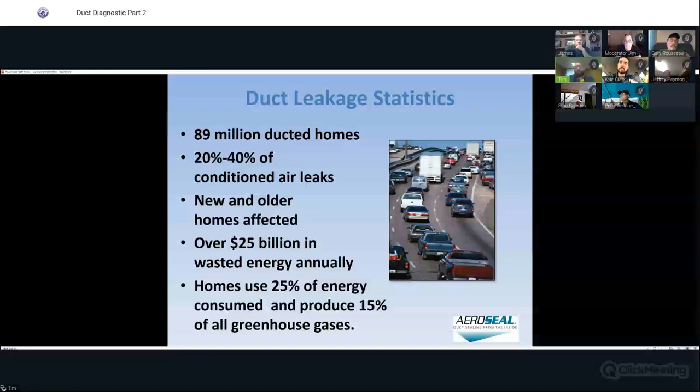So duct, sorry, I'm reading this because it's been a while since I looked at this slide. So duct sealing with regards to the EPA comfort. Whenever any homeowner calls you and says that they're uncomfortable in their home, 90+% of the time, it has to do with humidity.

Does anybody know what's the purpose of air conditioning? To remove the humidity, remove moisture. Beautiful, yes. So 90+% of the time when you get - and maybe you guys don't get these calls, but I get them frequently - people say they're uncomfortable in the house. Most of the time it's a humidity issue. Either the returns are leaking or there's not enough returns.

Health - anybody familiar with what's called the Venturi effect? So imagine a supply duct, but on the seams it has gaps. You would think the supply duct, while it's positively pressured and air is escaping because of the positive pressure, it's also putting the immediate space around all those gaps under a negative, and it's drawing debris actually into that supply duct, even though it's under positive pressure. That's called the Venturi effect.

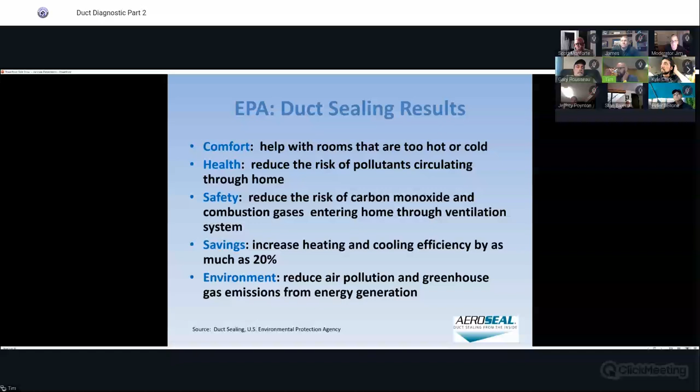Department of Energy, they did a ton of testing. Again, from what I'm learning, this slide is old, but from the stuff that they push out, it's only worse than that. And in my experience, I would even agree when I do duct testing, duct systems lose on average between 25 and 40% of their heating and cooling. The cost to seal and insulate the ducts has got an incredible ROI, which I believe there's a slide in here, the McKinsey chart we'll get to soon.

Only half a typical loss on ducts were saved. It would amount to, yeah, that all comes to energy efficiency.

Is there anybody familiar, at least in Connecticut, not Massachusetts? In Connecticut, they have an energy program called HES, Home Energy Solutions. Is anybody familiar with that? Okay, yeah. So to those of you who are not familiar with it, it's a program run by the utilities.

Essentially, you'll pay 50 or 75 bucks, and for you guys and for your homeowners, literally everybody should do this because it'll cost you 50 or 75 bucks. A company will come in and do about 4 hours worth of legit energy work to your house. To kind of explain how the program works, do you guys know what a blower door test is?

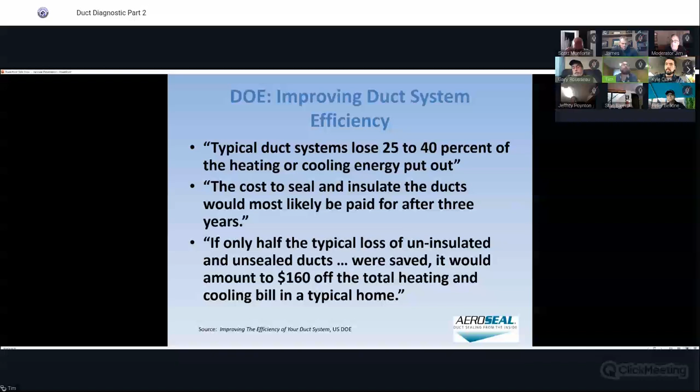This is the McKinsey chart I was telling you about. It just shows, in terms of duct leakage, sealing your ducts, is the biggest bang for your buck.

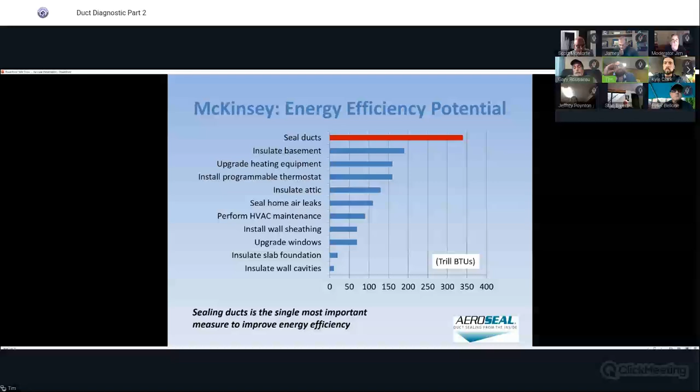I'm just gonna use my house for example. My house, obviously it's insulated now. I completely renovated the first floor, and then I blew insulation because it's balloon construction up in the outer wall. So I'd say my house is maybe a little spot on the staircase over here that's insulated, and with all the ducts, even though I went back and forth, I insulated the ducts. Every duct's taped, insulated, and I'm telling you what a difference as far as heating, the cost of heating, how much warmer, more comfortable it is, and the ducts don't leak. Everything's tight in the wall, above the ceiling.

Yeah, and all your ducts, I remember they were in a mechanical room in the basement. Everybody says the basement, that's the coolest part of their house. Well, right, inevitably it is going to be, but not to the extent that most of the time it is, when they're properly insulated, properly sealed.

And you went with round oval ducts, which even that, granted, splitting hairs, but the way air moves in a circular motion, I don't understand it, but rectangular ducts are what's mostly installed. It's not the most efficient duct. Round duct is the most efficient duct. So you did the oval duct, perfect, that's how it should be. Air travels in little circles in an HVAC system.

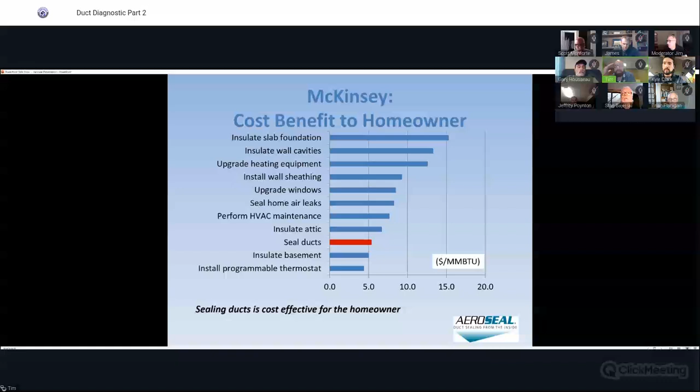Beautiful, this is the McKinsey chart. Cost to a homeowner, mine and your typical customers, sealing ducts is the biggest bang for your buck.

AeroSeal process, and this is, again, if you guys ever want to, it's a much more fun process to see in person than see on a PowerPoint presentation. But if you guys ever want to do something at our office, the people who can make it there, the people who can't, we can Zoom them in or whatever we got to do. It really is a cool process.

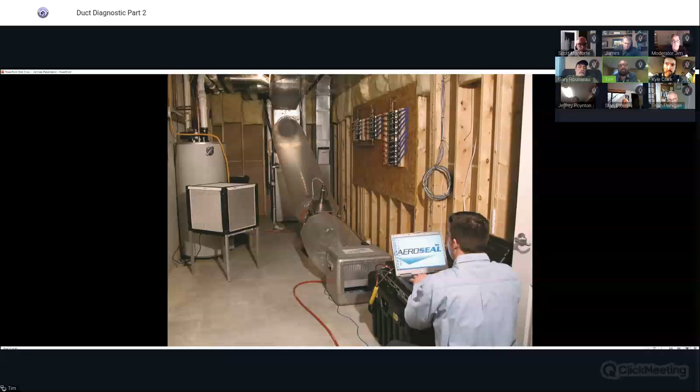You literally watch the ducts seal in real time. This is the older equipment, the generation 2. Now there's 2 pieces of equipment, I think you can see my mouse. You have the heaters, which is closer to the duct, and then you have the fan box. Now it's just one fan box that's there.

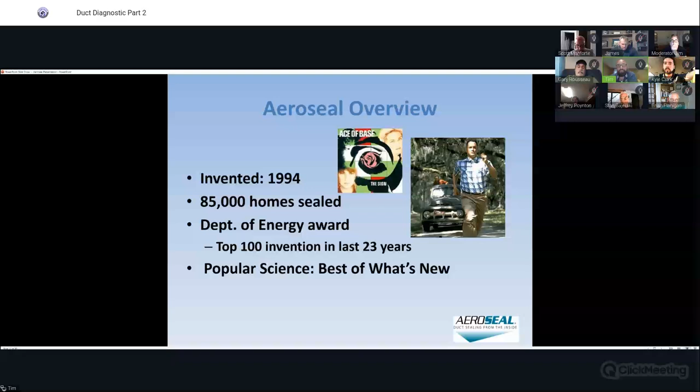AeroSeal invented in 1994. This is all old slides, now it's way past what these slides are showing. The president of AeroSeal, Amit Gupta, actually had a meeting a few weeks ago with Saudi Arabia, and now AeroSeal is getting into there because they've acknowledged duct leakage, and now they're going nuts over in Saudi Arabia with air duct leakage. So all these slides are very minuscule and old compared to

how big an issue duct leakage really is. And real quick, there was a question, and I said just Connecticut. You guys just work in Connecticut, but you have people that do duct sealing all over the United States, right? Every state, pretty much. Well, so we are an AeroSeal dealer, correct?

So AeroSeal, they don't call it a franchise, but I guess we bought into the franchise. So yes, AeroSeal Corp is worldwide. New Jersey, there's companies in New Jersey, et cetera. We are only in Connecticut, we do borders of New York when it's referred. Obviously, the farther we have to travel, the more we have to charge. But there's AeroSeal dealers everywhere now, including Saudi Arabia now within these last weeks. AeroSeal Corp, they're out of Ohio, and yeah, we are a franchisee of them. Our company is located in Milford, Connecticut.

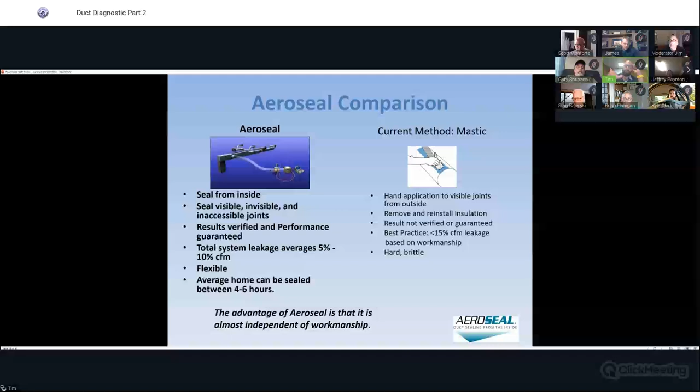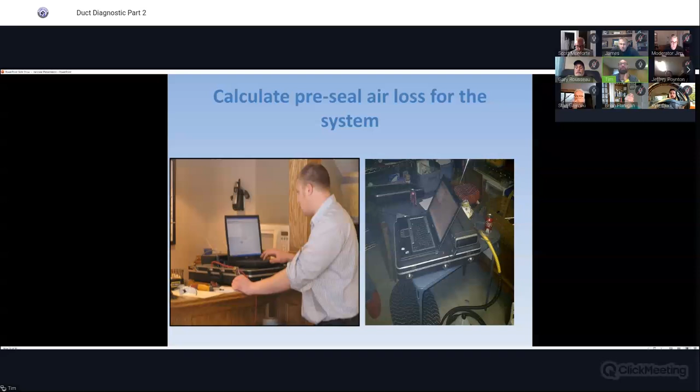Just the graph going down means pressure's building in the duct, which means the ducts are inevitably being sealed. But with regards to this presentation, they're still on the pre-test. So they put tape over all the supply and return registers, get the pre-test, get their number of pre-leakage. That's the normal duct test at 25 pascals, which is 0.1 inch of water column.

Now, to prep for AeroSeal, what we actually have to do is take these foam blocks and cut them to size so that they can snugly fit in each diffuser, each return and supply register.

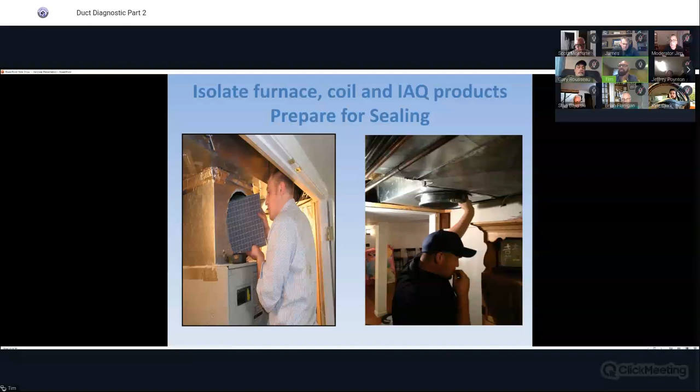We take another foam block and protect the air handler or the furnace. That's what's on the left, he cut a big hole. He's got to jam that in and make it airtight because you don't want any of the polymer to go into the furnace, into the coil. So you're essentially sectioning off the supply and return ductwork.

And this is the magic. The top left photo is the AeroSeal equipment hooked up to the supply side of the duct system. The lower left is just a picture of the AeroSeal equipment.

The bottom middle and bottom right show the polymer after it's sealed. Notice it doesn't line the inside of the duct system. The pressure and flow during the sealing process keep the polymer suspended, and it only sticks when it tries to squeeze out a slip and drive joint, a gap that's not supposed to be there. So the bottom middle and lower right, that's the actual polymer.

And then in the upper right, you'll see the screen that we see while we're sealing.

The left axis of the graph shows CFM of leakage. It looks like it started at almost 400 CFM of leakage. It's a little blurry. The bottom axis shows minutes of sealing time, in some increments. As you seal longer, it changes, but it looks like it went to about 25 minutes of seal time, and they sealed almost 400 CFM of leakage.

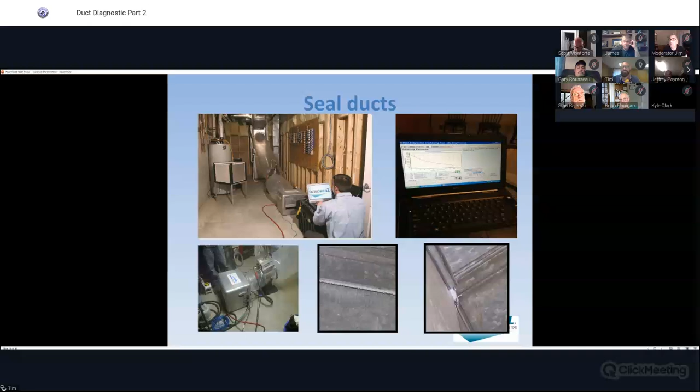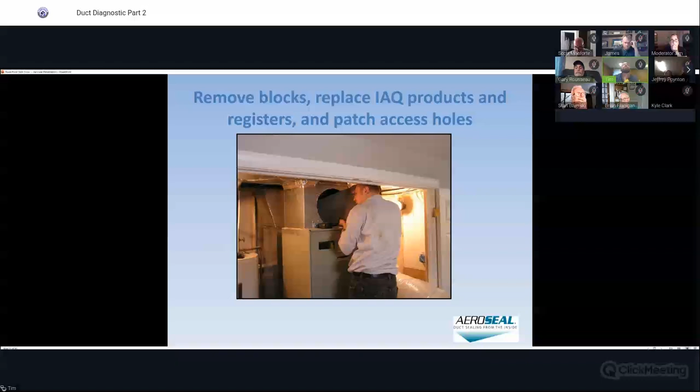Who here knows what a CFM is? Cubic feet per minute. Yes, cubic feet per minute, CFM.

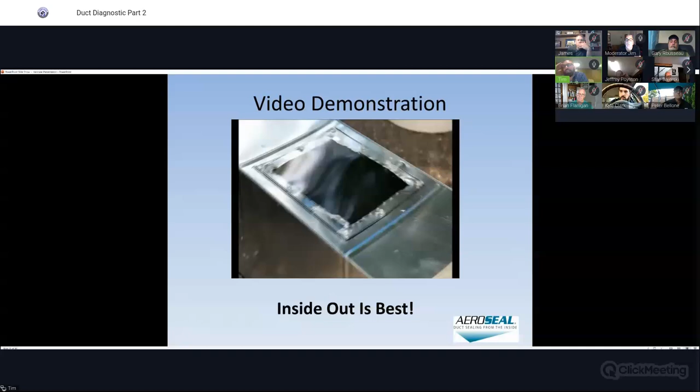So this is just a cute little video they sent us to show people. This is a duct system—they cut a hole in it and screwed in a plastic piece just so you can see the inside, and drilled a bunch of holes in it. This test is literally what we have in our office. If you guys take me up on my offer and ever want to see this process in real life, we took a duct section just like this, drilled holes in it, and sealed it.

No sound. No, it's just a video.

I mean, that's a very simplified version of the process. Any questions? Impressive. Sweet.

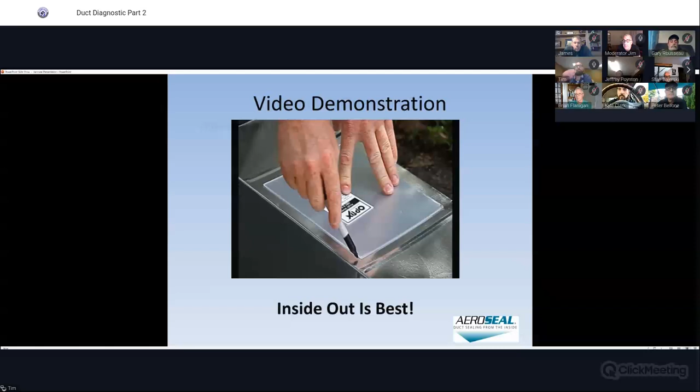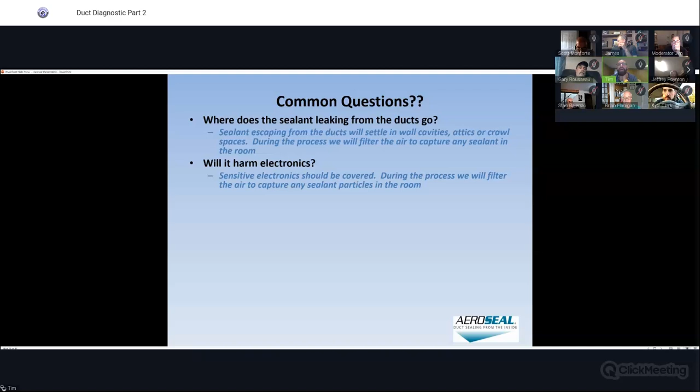Will it harm electronics? Finished basements with TVs — those finished basements are the toughest obstacles we have to overcome. We cover TVs because the static electricity from the TVs will attract the polymer. So we protect them in plastic. We have our whole thing for that.

That's the important part of why we do consultations before AeroSeals. HVAC accessories — we're trained, we protect everything: UV lights, ERVs, specialty filter racks. We're BPI trained, we know all that. And I say that, and then tomorrow I'm going to see something I've never seen before with all this new technology coming out.

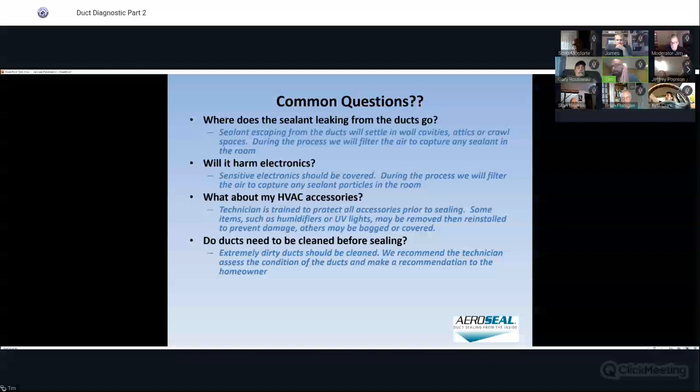Here's a biggie: do ducts need to be cleaned before sealing? I will recommend everybody take advantage of the HES audit if you haven't already — everybody should do it. The downside is a lot of those HES companies have no problem aerosealing ducts before you clean them. Now, one of two things will happen if you seal ducts without cleaning them.

Typically on the return side, there's a heavier buildup of debris, because the return acts as a vacuum on the room. So if you have a room with carpet, all that dust builds up — typically returns have a heavy buildup of debris. The polymer will stick to it, gunk it all up, and make it no longer cleanable. On the supply side, where there's a lighter buildup of debris, polymer isn't going to stick to anything, but it will increase duct pressure and static pressure while the system's running, and it will increase flow.

So stuff that used to not be airborne will become airborne and shoot out. What we do whenever a customer wants AeroSeal without duct cleaning first is, when we're done sealing, we put a filter material over all the supply diffusers. We use cheesecloth and tape it to all the supply diffusers, so that when we kick the unit on at the end of the day, any debris that gets airborne, we're at least protecting the house. Most of it gets caught in that white cheesecloth.

And inevitably, the homeowner sees the cheesecloth and wants their ducts cleaned anyway. So if you do the HES audit and you're applicable for AeroSeal, my strong recommendation is please, please get your ducts cleaned before your AeroSeal, or you're going to have crud blowing out into your house. We've actually disagreed with AeroSeal Corp on that — that's our little test, and almost every time the cheesecloth discolors and the homeowner needs their ducts cleaned after we seal.

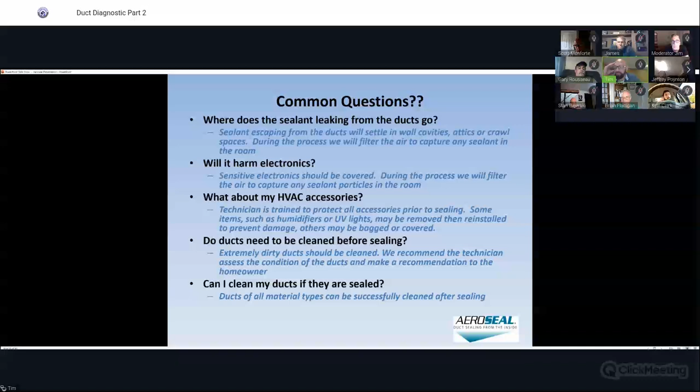Can I clean my ducts if they're sealed? We can clean them of loose dust and debris, but inevitably there will be a little bit of stuff that sticks to the bottom. From a duct cleaner's perspective, I'm not overly concerned about that little stuff, but yeah, we'll get them 95% cleaned.

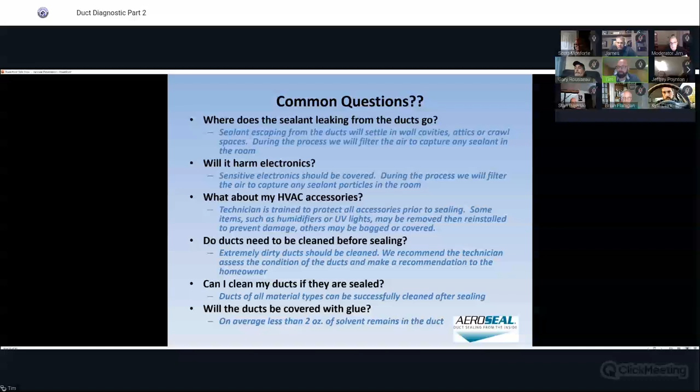Will the ducts be covered with glue? Very, very minimal — you can't see it with your eye. You can only barely feel the bottom of the ducts if it's installed correctly, in terms of polymer being in the ducts. So super minimal.

Consumer benefits: you get air quality. We talked about the Venturi effect, energy savings.

That's the big one. Obviously these energy codes for new installs, we can go all day on those. That's my specialty, I'm on a codes committee. These new codes are insane. HVAC companies, I've only had a handful pass these new energy codes, which alludes to the fact that even the government knows duct leakage is a huge issue.

Comfort benefits from balancing your system. If there's duct leakage, good luck maintaining pressure in your duct system, good luck balancing your duct system. And then the air quality, obviously the Venturi effect, pulling in unwanted crud into your breathing air. Nobody wants that.

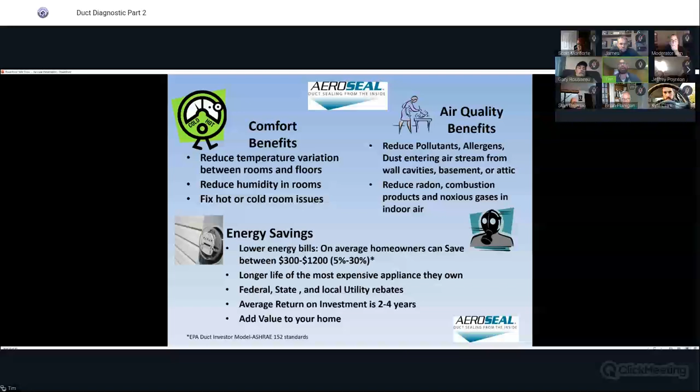The other cool thing is it's immediate. When we're done sealing the ducts, the benefits are immediate. When we break down the equipment and turn the system on, from that point forward their ducts are sealed and they can enjoy the benefits of having their ducts sealed.